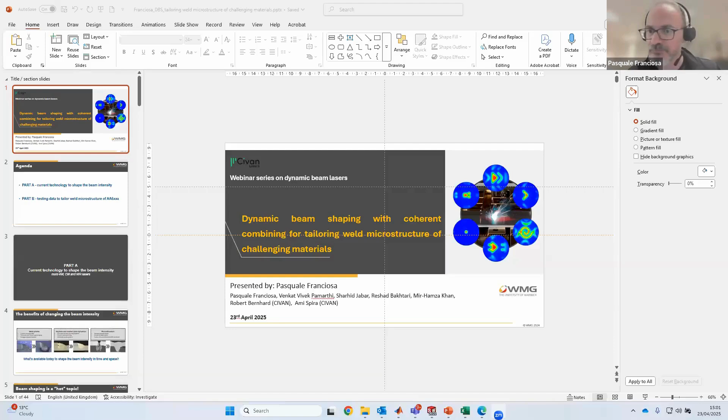Okay, so I hope you can hear me well. Thanks, Ami, first of all, for inviting me to attend this webinar today. So let me start sharing the screen. Can you confirm you can see my screen, Ami? Yes, we can see the screen and hear you and see you well. Okay, perfect, so let me get rid of this. Okay, yeah, so I think I'm ready to start.

So thanks again, Ami, for the introduction, and welcome everybody. I guess you are spread across Europe, maybe America, and maybe from Asia as well, so welcome everybody. I was basically tasked by Ami a few weeks ago to present on dynamic beam shaping with coherent combining for tailoring weld microstructure of challenging materials.

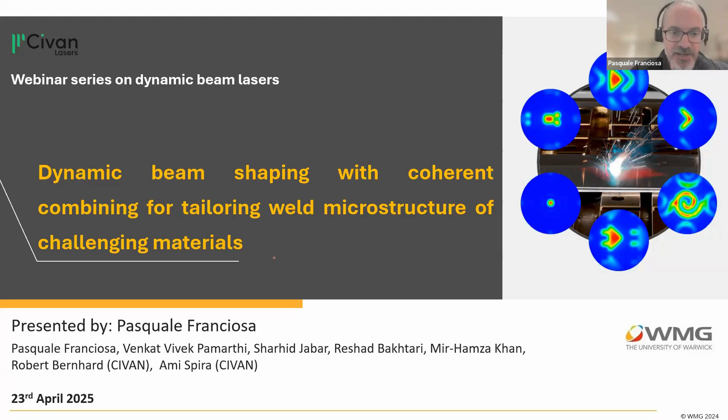This was not an easy task, because tailoring the weld microstructure using laser is like the holy grail - everybody is trying to do that. So what I will do today is present our latest results using the CBC technology from Civan in trying to refine the weld microstructure in specific metal applications, that is aluminum 6000 grade alloys.

The way I've organized the presentation is basically in two parts. Part A will be a review of current technologies for shaping the beam intensity, shaping the intensity in time and in space. Then we jump to part B, which is more the testing data and experimental evidence from experiments we've been doing recently on some of the 6000 grade aluminum.

The reason why we have been focusing on aluminum 6000 is because of the high solidification cracking sensitivity. And obviously refining the grain structure with those alloys is quite important, because if we succeed, there is a significant margin in improving the mechanical properties and the mechanical strength.

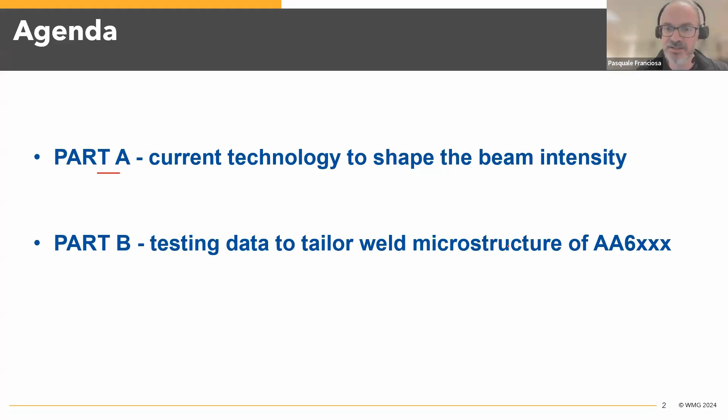So now let's start with the first part of the webinar. As you can see, I've been focusing the attention only on multi-kilowatt CW near infrared lasers. I've been omitting some of the other well-established technologies for beam shaping because they don't fit within the scope. So don't be surprised if I am ignoring a couple of other technologies which are available out there.

First of all, why we do beam shaping - this was the expectation and the benefits of implementing a beam shaping solution within our welding process. We can probably divide it across three areas. First is about optimizing the weld profile, or controlling in a better way the weld profile, and this means eventually enlarging the process window, or bridging bigger gaps between parts, which is very critical in many manufacturing environments.

The second area, which is also growing quite significantly, is the possibility of controlling the keyhole and in general the molten pool dynamics. If we can do that, we can eventually reduce or control the porosity and the spatter during the welding process, and increase the welding speed. There is really significant research around area two - people all over the world focusing on different approaches for controlling molten pool dynamics, including the molten pool shape. There are many contributions coming almost every couple of days.

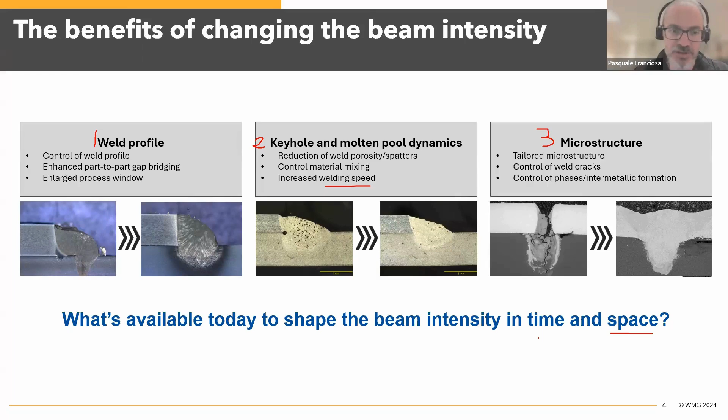So now the question is, okay, we know the potential benefits of beam shaping, but what can we do to achieve beam shaping? And when we say beam shaping, it's not only the beam shaping in X and Y, or in Z. Beam shaping can also be done on the focus steering, so X, Y, Z. But it's also about time shaping - shaping the intensity distribution also over time during the weld operation.

Beam shaping is a very important topic, and you can see from the amount of papers which have been produced over the last few years. Probably 5 or 6 years ago, beam shaping was growing, but was not very visible to the broader community. But over the last 5 or 6 years, starting from 2020, it's almost exponentially growing. So the interest of people in research, in applications, and in industry has been growing very significantly.

This graph, we took data from the Scopus database. We used those keywords you see there with beam shaping as an additional keyword, and you can see some of the statistics. This proves that beam shaping is an emerging trend within the laser material processing community. There are many contributions, and on our end, we're also investing time and resources to really understand more and more what we can do using beam shaping.

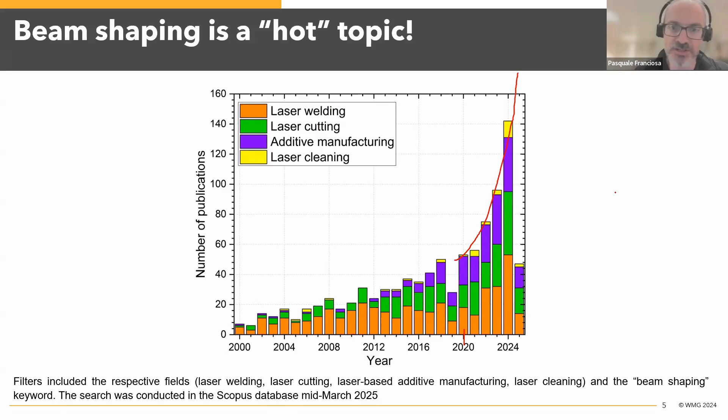Within e-mobility, so within the electrification and e-mobility sector in automotive, those are some of the core applications where beam shaping has already been deployed. Very common in those areas are applications of wobbling and core-ring technology, so central core and outer ring. Now, different materials, different thicknesses, and different speeds involved bring different eventual properties of the beam shaping used.

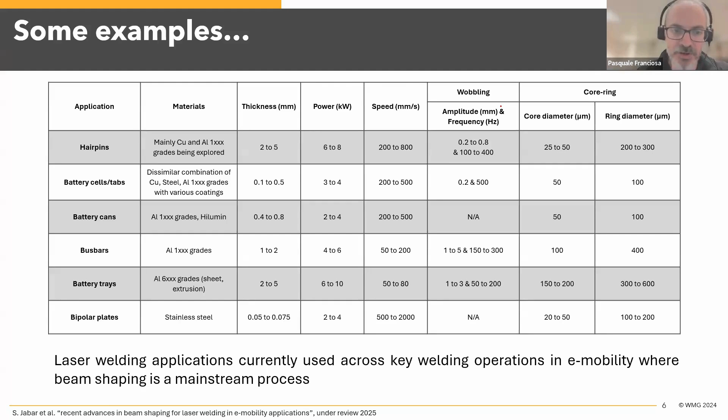Now, why do I say wobbling is a beam shaping? Because in essence, by using wobbling with a galvo scanner, you are also steering the beam intensity on the workpiece. So that, to me, is classified as a beam shaping technology. But I will come back in the next couple of slides and show you how we compare wobbling technologies against the bigger picture of beam shaping technologies. So just keep it in mind.

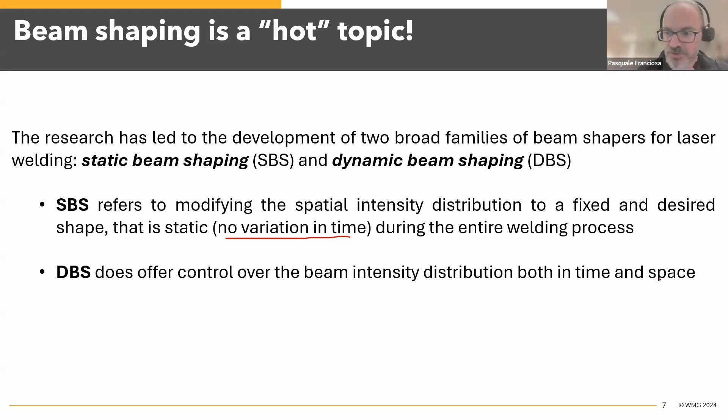In essence, there are two categories: static beam shaping and dynamic beam shaping. With static beam shaping, we can control the intensity distribution in X, Y, and Z, so in space. However, it's static, so once we set it up, we can't change the distribution over time during welding. There is no variation in time. Dynamic is adding the missing element—dynamic means we can control the intensity distribution in time and in space, with different resolution of time and different resolution of space.

So there is a clear dynamics, and the whole idea of using dynamic beam shaping is to influence those physics as they are happening, in such a way that we have a tailored response of the material properties in the end, once the weld, the material, is resolidified.

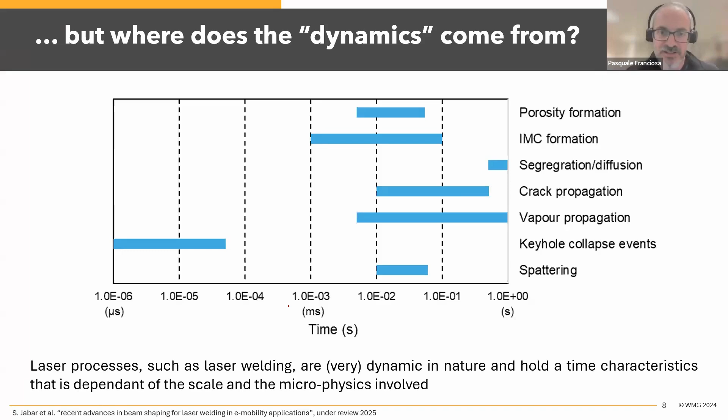So how does it work in practice? When we say beam shaping, starting from static solutions—static basically means we are somehow altering the optical configurations within the welding head. The simple solution is to add what we call aperture elements. Typically, you can put these just on the collimating path or on the focusing path of the welding unit. In essence, you are just limiting the opening for your laser light, so you can get some sort of shaping. This is not very efficient, and it's not even too much used in industry today, because you're literally wasting some of the laser energy and not transmitting it through.

So more established is option C: the possibility of using diffractive optical elements (DOE) and refractive optical elements, or also micro lens arrays, which again you can retrofit within the optical element. The benefit is the possibility of generating theoretically free-shape distributions on the workpiece.

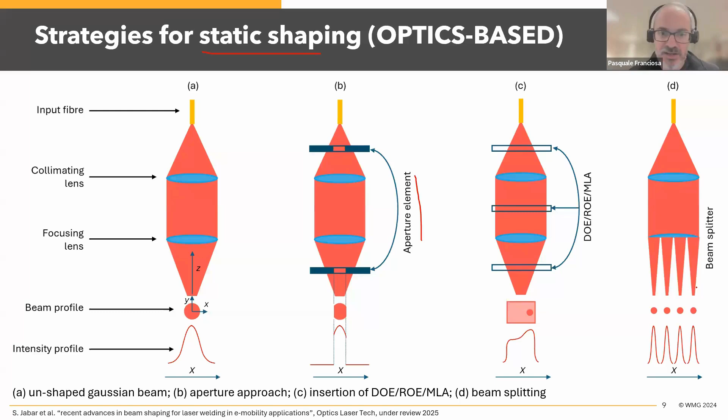Other options include beam splitting, which splits the light into multiple spots on the workpiece. This is quite established and works well if you want to reduce processing time, since you have multiple beams running at the same time.

The deformable mirror is not very industrially deployed yet, but conceptually you have multiple mirrors electronically tilted in X and Y, and because of that you can get a free shape profile on the workpiece. It's quite interesting, but not that fast—we're only talking a few hertz modulation over time.

Another option is MPLC, multi-plane light converter. This also theoretically gives a free shape profile on the workpiece, and we're talking tens to a few hundred hertz modulation. So all those options—E, F, and G—are within the scanning family.

Non-scanning families, so in-source solutions, we can probably group into two categories. One is fiber to fiber coupling, where you get the very famous core-ring configuration for beam distribution. This is well established in industry, starting probably 5-6 years ago. There are a few different industrial implementations of this technology, but it's only limited to one shape, core ring.

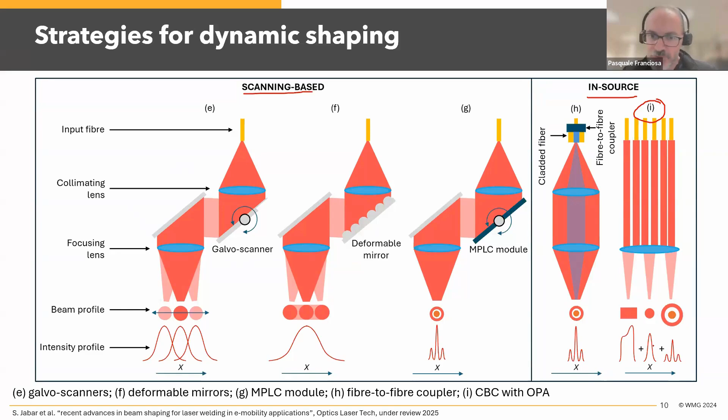The way it works is the laser machine itself modulates the phase between all those single mode beams. Because of the phase modulation, you can theoretically and virtually get any free shape on the workpiece. On top of it, since it's fast enough—we're in the megahertz switching frequency—you can switch between shapes during welding. So there's a lot of opportunity and capability there.

So this I've already discussed briefly, but you can see the pros and cons of those technologies. Interesting enough is this level: the possibility of controlling the temporal distribution of the beam intensity during welding. With the static one, obviously there's no way of adjusting unless you're modulating the input power.

With the dynamic options, yes, there is a possibility, but you're eventually limited by the switching rate. Using the CBC, you can go very high, talking several tens of megahertz, close to 80 megahertz, so switching within a few nanoseconds—quite fast. Also more interesting is the scalability of the power. With the CBC and OPA, you can go very high power, probably even more than 100 kilowatts today, with theoretically no limit.

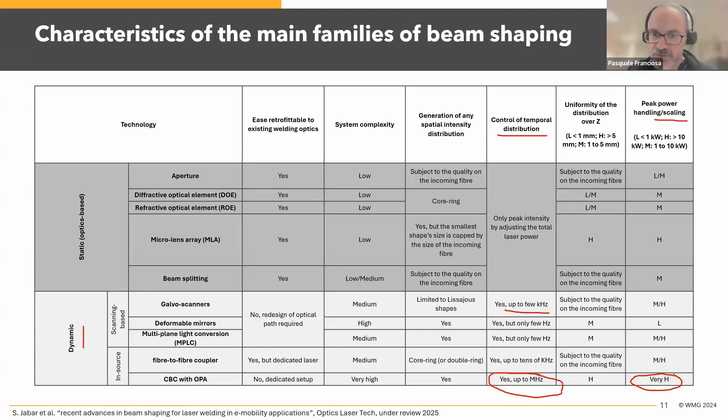So again, there are benefits, but this also brings more complexity. Now this is an important point I want to raise: when we talk about dynamic beam shaping with the CBC, with OPA, we shouldn't assume we can generate a static shape from there. With the CBC, the shape is always dynamic.

So if you look at the example on the slide, and I say I want to create a shape with 3 dots—one, two on the side, and a central main dot in the middle—we'll never see this profile on the workpiece at once. You'll always see the combination over time, with a given dwell time of the diffraction pattern. So the shape generated by the CBC is a combination of multiple diffraction patterns overlaid over time.

So in essence, what we are controlling on the workpiece is the fluence - the energy we are throwing to the workpiece by overlaying over time multiple diffraction patterns. How many diffraction patterns? It depends on the resolution of the beam intensity we want to get in the end. But theoretically, we can go to 1,000 diffraction patterns overlaid within as small as 12 nanoseconds.

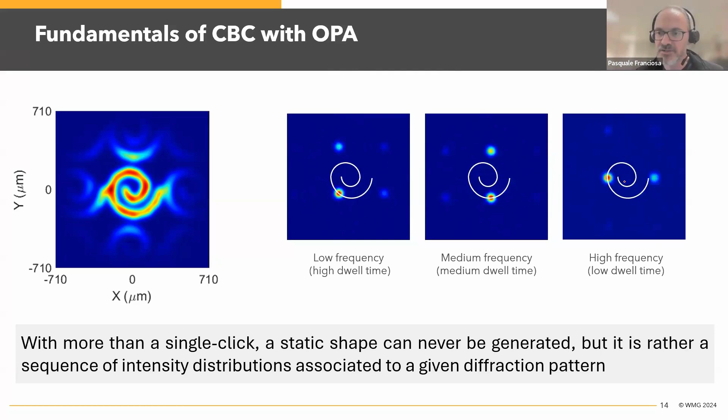You can control the frequency of switching between those diffraction patterns. You can go very low in frequency, so very high dwell time, or the other way around - switch with very high frequency, so very low dwell time. These are important points to remember, because by using this technology, we can really influence the thermal cycling during welding by switching at high frequency on and off those diffraction patterns. And one diffraction pattern basically means energy concentrated within those dots you see on the screen animated.

And this is a question now: does it mean we can control the thermal cycling? The answer is yes. So if you take a single Gaussian beam, just the Gaussian dot in the middle, and you imagine you are moving the dot horizontally towards the right-hand side, that is exactly what you do when you do welding, because you are traveling with your laser beam on the workpiece, and you're plotting against the interaction time.

So here I'm tracking position 0,0, the same point on the workpiece. I want to see how the intensity is changing as the beam is moving horizontally in that direction. So with a single Gaussian beam, you will see basically the Gaussian profile on the workpiece - a very sharp transition of the intensity profile.

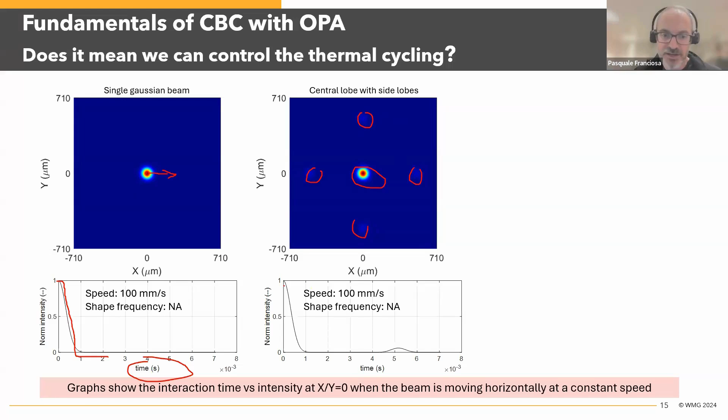If you do the same exercise with the most fundamental diffraction pattern you can get from the CBC, you will see a central dot in the middle and then 4 satellites we call lobes on the side. You can see the cross section of the intensity profile with the lobes on the side.

Interesting enough, if we add more than one pattern - for example overlaying 3 diffraction patterns very close with each other - you can get like a slightly elliptical shape. Then you can see what's happening to the intensity profile: you're basically switching on and off, on and off, and you can see how the intensity is going up and down, up and down.

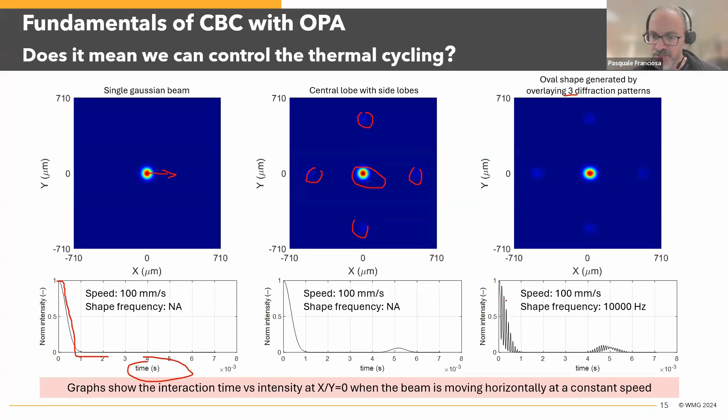By modulating the frequency, or by choosing the right frequency for your process, it's like a duty cycle you can induce in your material. Duty cycle is what you do with any pulsed laser - nanosecond, femtosecond, or picosecond laser. You are controlling duty cycle. It's not something you do with CW lasers.

So now the question is, there is a possibility of modulating the intensity profile in as small as a few nanoseconds. How can that capability help in influencing the grain structure? Can we use this technology to really make changes to the grain structure? So conceptually this is what you see on the slide.

We start eventually from the liquid phase - the metal is in the liquid phase. Then because of the cycling, we are cooling down. And then again, after a few milliseconds, a few microseconds, we are pumping in some heat input within the weld. You can see eventually the grain is refining, the segregation is distributed, and then you get the property which is optimal for your application in the end. So that is the concept.

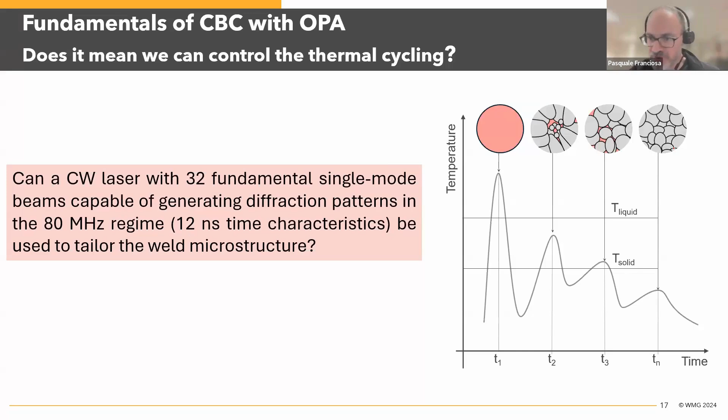Now let's put this concept into practice and see how this looks. This starts part B of this webinar, and I will focus on two applications around laser welding, autogenous laser welding of 6000 grade aluminum.

Why did we select this application? First of all, 6000 grades are very well used within different industrial sectors, especially automotive but also aerospace, so there is significant, massive demand for those alloys to be welded. However, they're not very easy to weld, especially if you want to weld without adding any wire or altering the chemical composition.

The cracking process is quite complex, a complex interplay between different parameters and different physics involved. In essence, it's a combination of microstructural and metallurgical elements together with stress and strain related elements. Some theories say the crack happens because of the shape of the molten pool: if it's very stretched and elongated there is more crack sensitivity. If there's a chance of reducing the extent, especially of the mushy zone, there's a chance of reducing crack sensitivity.

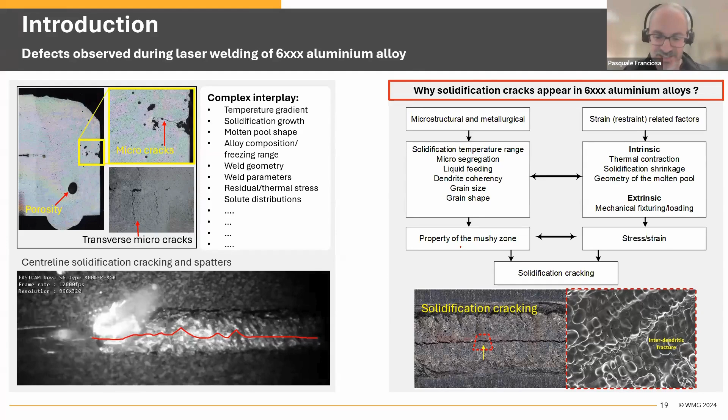So cracking is a complex process. People have been researching the reasoning for cracking and solutions to hot cracking for many years, but it's still a hot topic in industry because we are still facing challenges when welding those alloys.

To put this in perspective, here on the slide is some data from testing experiments we've been doing recently. This was a comparison between different welding processes: CMT on one end, then laser welding with addition of a filler wire, a wire-fed welding process, and then autogenous welding, only laser without even shielding gas.

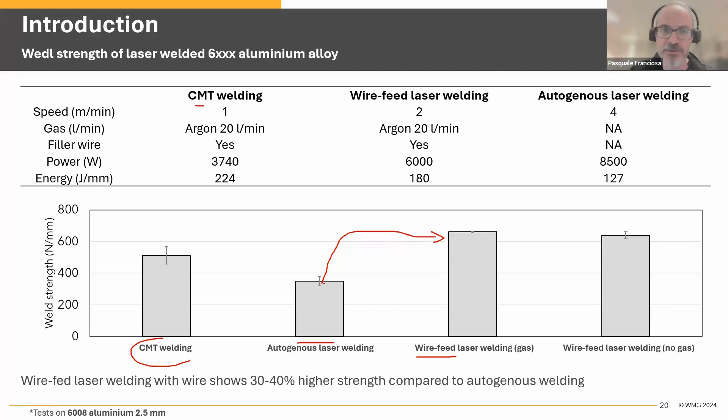You can see the gap: there's almost a 30 to 40% drop in strength when welding those alloys fully autogenous. A 30% drop in strength is automatically a no-go from a certification point of view, so the end user will never accept that level of strength because it's not satisfactory.

Now, beam shaping. We have been researching static beam shaping for some time, doing different testing and trials. You can see schematics of some of the shapes we've used, starting from single core, then core ring with different diameters, and even a tailed beam profile.

All those shapes are static, but you can see the trends in mechanical performance, tensile stress. There's approximately a 20% increase in strength when you go from a single spot to a tailed beam profile. All those welds were made with the same processing speed, 25 millimeters a second, on the same material and thickness.

This basically proves that even with static beam shaping there is already margin for improving weld performance. Why is that? You can see from the EBSD map that the reason for the increasing strength is most probably grain refinement—more grain boundaries means a chance of increasing strength. That's just background information.

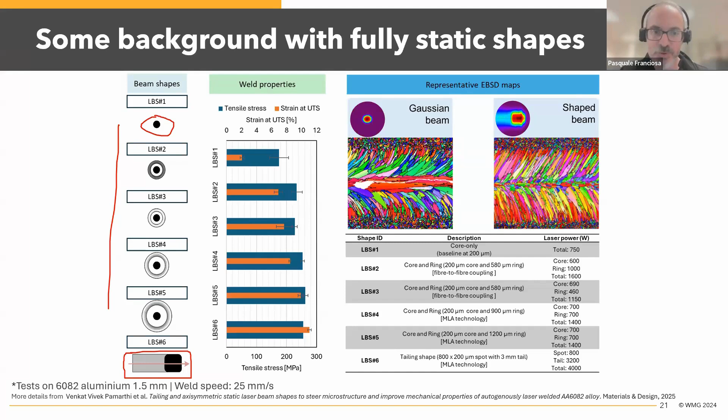With that knowledge, we started working with the CBC technology, asking ourselves: is there margin to improve properties even more? Is there margin to tailor the grain structure to meet specific weld properties in the end? This is where we started.

Application one is on 6061 aluminum, an overlap weld. The sheets are quite thin, 0.4 on top and 0.8 on the bottom.

Yeah, and this is what we did. So this basically is a comparison between the CBC technology from Civan.

In this configuration, we are using the 1.5 meter focal length, which gives the smallest spot diameter on the workpiece, close to, let's say, 130 microns is the smallest one. Obviously, if you reduce the focal length, you will get a smaller spot, but in this project we have used 1.5 meters focal length.

So welding speed was constant for all the experiments, 110 millimeters per second across all experiments. Power was on average between 3.3 and 3.5 kilowatts for either a single click or a sequence of clicks. A click is understood as a diffraction pattern, so one click is associated with a single diffraction pattern. No wobbling, no shielding gas, and the fumes were extracted with a fume extractor positioned nearby the weld area.

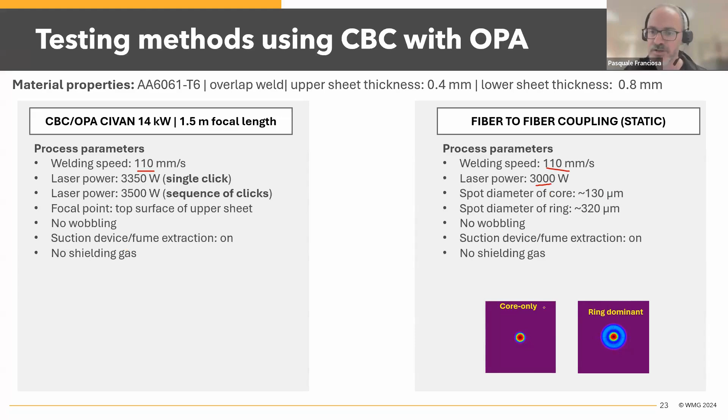So we've been benchmarking against the more standard core ring technology. Again, the speed was the same, the power was slightly reduced because the core spot was slightly smaller, and again the same clamping and the same welding conditions.

For the beam shapes, we started with very fundamental shapes: only a central lobe, so a central spot with 4 satellites, which are a consequence of the diffraction pattern with the CBC. Then we moved the point either to the left or to the right. Moving to the left-hand side is like adding a second spot into the diffraction pattern.

This means eventually doing a preheating, because there is a spot traveling in front of the weld, preheating the material. If you do the other way around, moving the spot towards the right-hand side, it means it's a post-heating exercise because the spot is coming behind.

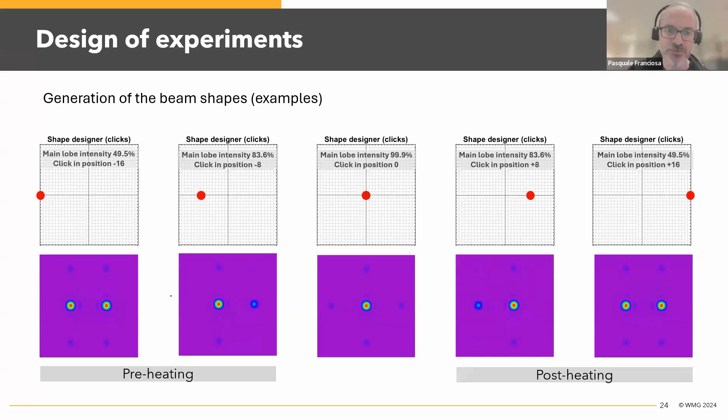This logic makes sense because, using the same laser with the same input power, you have the possibility of switching the spot forward or backward, doing either preheating or post-heating on the material. And we wanted to really see how the weld microstructure looks like.

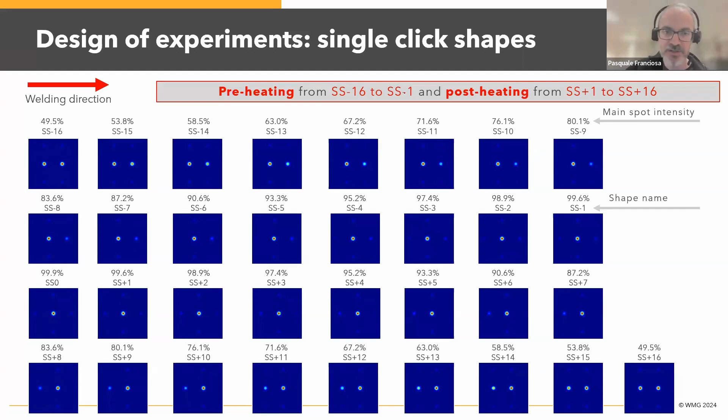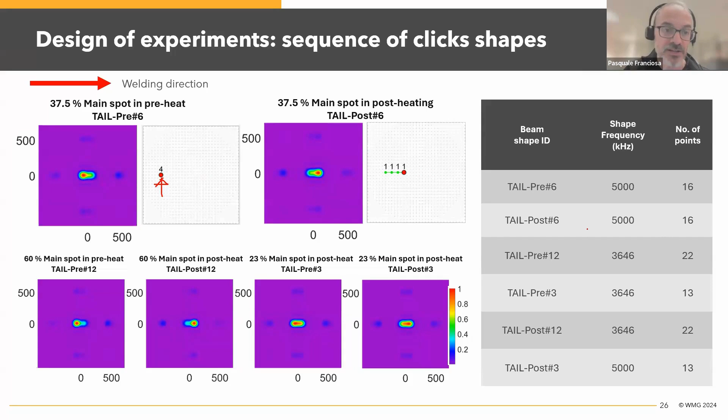With that logic, we generated those 6 profiles. Again, the welding speed was exactly the same, 110 millimeters a second, and the power was adjusted to get full penetration across all those welds.

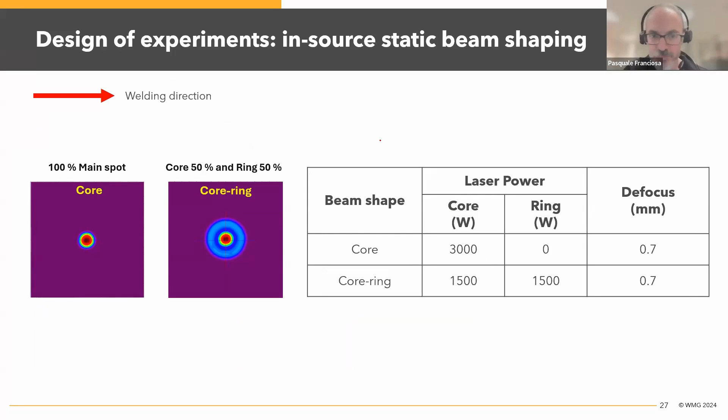And those are the parameters for the core ring. Again, the power has been adjusted in such a way that we got full penetration on the weld - that was the basic requirement to say the welds are comparable in terms of weld profile.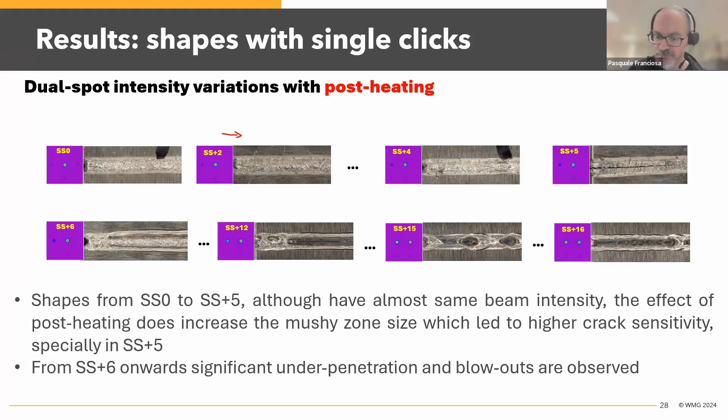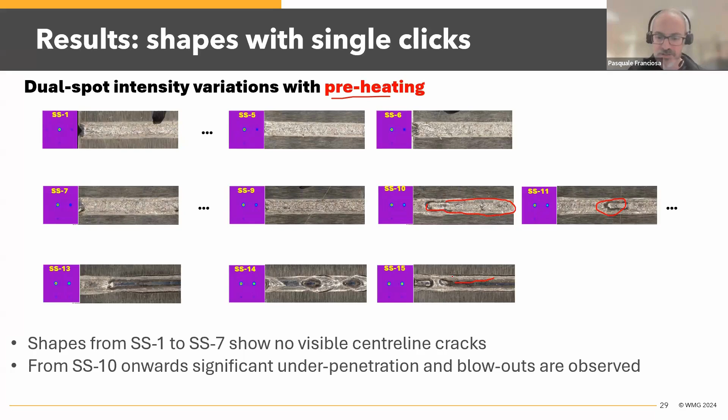Now if you do it the other way around, with preheating, we follow the opposite logic, so we switch towards the left-hand side. The spot on the front becomes bigger and bigger as we shift towards the left, up to position 7, which is almost centreline crack free. As we keep moving further on the left-hand side, we notice the presence of lack of fusion, some blowout, and this again is a massive blowout with very significant lack of penetration.

So if you analyze the cross sections, this was very clear evidence from all those experiments that when we are preheating, because of the preheating spot, we are preheating the material itself. Since the material is very thin, only 0.4 millimeters, the tendency is to basically pre-bend before the main spot comes into it, and this adds a significant void. That void is basically caused by the preheating beam coming in front.

That effect doesn't happen with post-heating. On post-heating it's the other way around, we are only heating the weld that has already been created, not before. So the warping effect is much reduced.

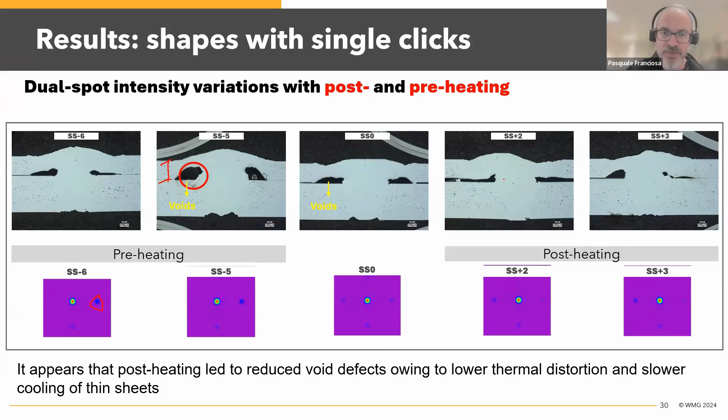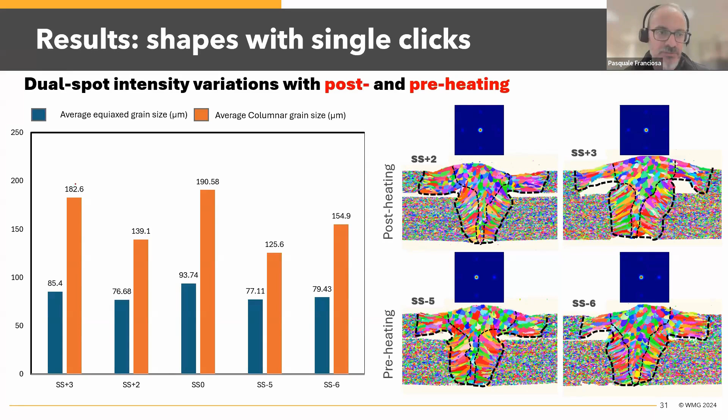Now, if we go to the analysis of the grain structure, on the slide you see some of the EBSD maps, which are probably the most relevant ones. You can see from the bar chart the distribution of the grain, equiaxed grain and columnar grain. There is a trend, but it's more interesting to see the full picture.

This is plotting the area fraction of equiaxed grain, starting from the core beam, static beam distribution, to the tailed beam profile with a slightly higher peak intensity towards the front of this elliptical distribution. You can see how the bar chart looks: starting from 25% area fraction of equiaxed grain, ending up close to 55% equiaxed grain.

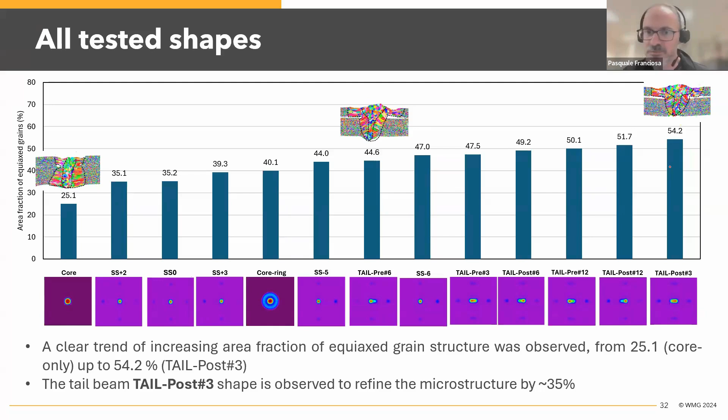This basically proves that by selecting the appropriate beam profile, there is clear evidence that you can tailor your microstructure. By tailoring the microstructure, especially in this case with 55% area fraction, it means there is 55% refinement. It means there are more grain boundaries within the weld, and with more grain boundaries, the mechanical property of the weld is eventually going to be improved. It's a stronger weld, because more grain boundaries means increased mechanical performance.

However, we have to pay attention to one element: since with the diffraction pattern we have those side lobes created within the beam distribution, those lobes are not negligible. They account for approximately 35 to 40% of the total intensity distribution, and 35 to 40% out of 3-4 kilowatts or even more is quite significant. You can see the effects here - this area on the left and this area on the right is the direct consequence of those lobes.

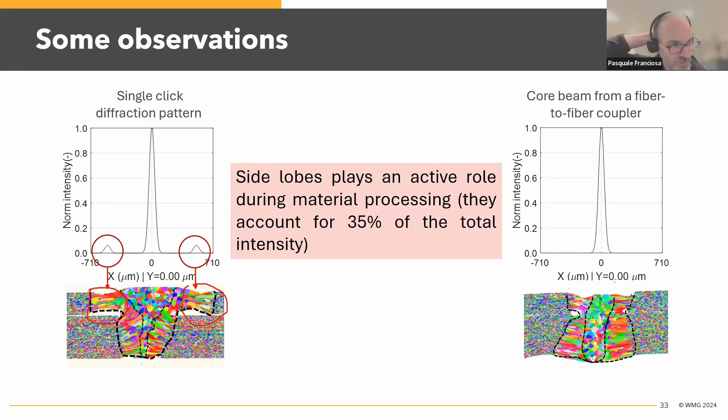So when doing laser material processing, like welding, but also additive manufacturing with this technology, we have to pay attention to the position of those lobes. If we don't, we might have unwanted or unexpected defects and not know why. So we have to keep an eye on those.

So the second application again is on 6000 grade aluminum, 6082. This time it's thicker, 1.5 millimeters, and it's a bead-on-plate testing session we have done.

This time we've been more creative, creating shapes which are more sophisticated. Again you can see in the table the power used - we are between 3 to 4 kilowatts, speed always constant at 100 millimeters a second, and the frequency was kept constant at 2 megahertz.

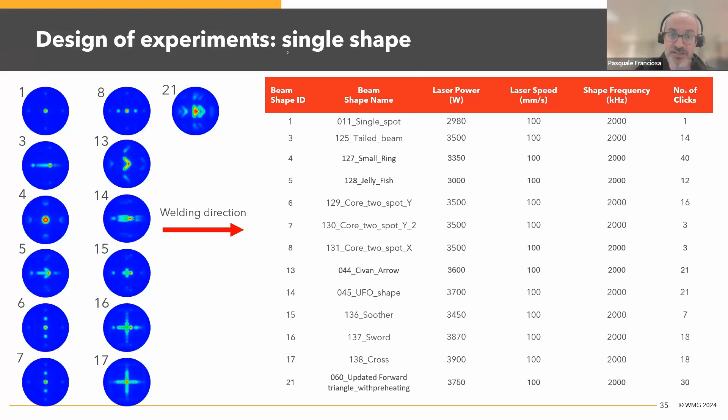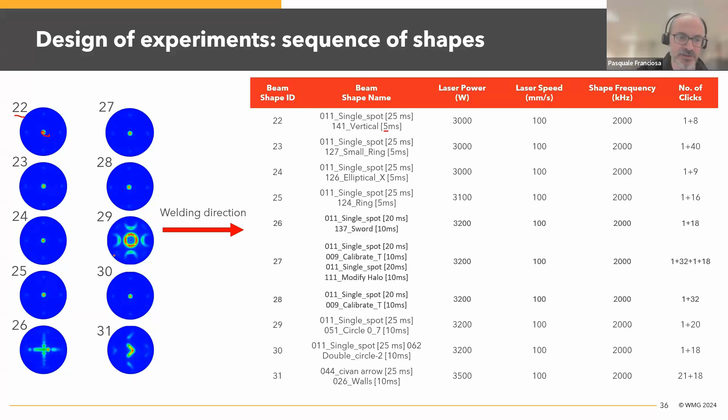So we've been producing, to make all those experiments, it takes time because we have to try the shape and then take all the metallographic sections. So we produce all those experiments. And these are, again, some of the statistics from the EBSD maps.

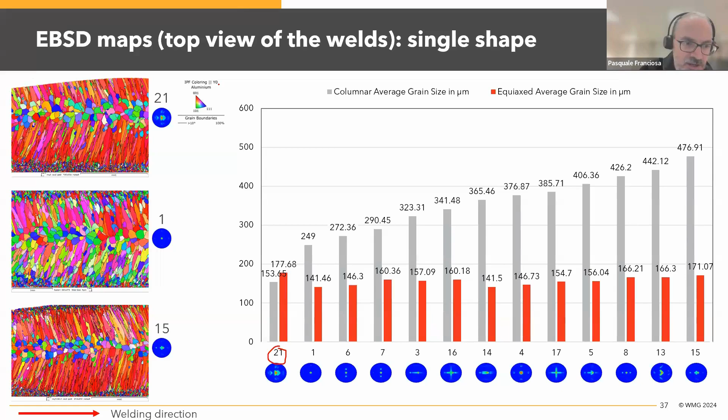So the reason why there is a change in the aspect ratio of those columnar grains is probably imputed to this effect - the effect of modulating, pulsing, if pulsing is the right term to use in this case, the possibility of modulating the heat intensity distribution as you are passing through with the laser beam. And this is exactly what is happening.

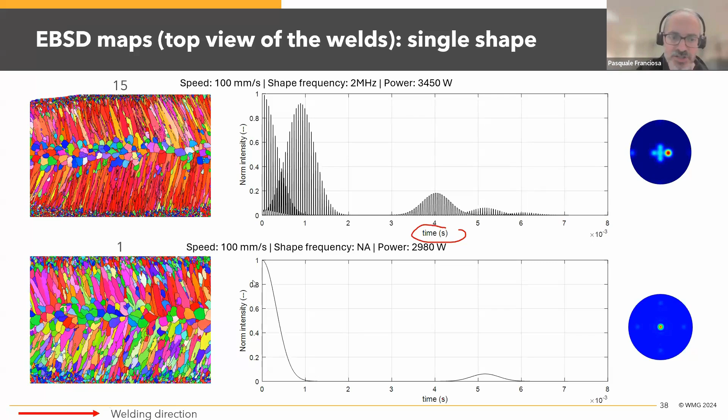We don't have thermal data yet because this is still work in progress. So we don't have evidence from the thermal distribution and from the cooling rate if there is any correlation, but there is clearly a correlation between the beam profile distribution with a given frequency for creating and generating those shapes and the corresponding grain structure produced in the end.

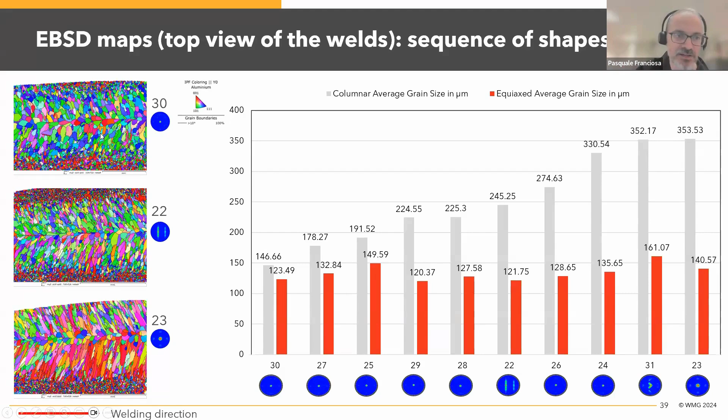So this one is showing some of the results with actual sequences of shapes - so this is more than one shape. For example, shape 30, you are starting with a single dot in the middle, and then we have a sort of ring going around, and it's going on and off at the given frequency, and then same for other cases. And then again, we have evidence of grain change in the grain structure.

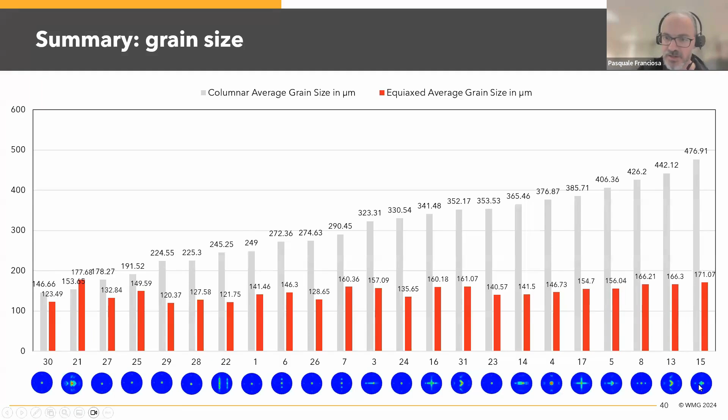So if you put all the results together, you can see the spectrum of how much the structure is changing. Focusing on the average size of the columnar grain, you can see you go from 150-ish microns up to 480 microns. If we analyze the aspect ratio of the columnar grain, there is probably a four-times fold change, from 2 to 8, in aspect ratio of the columnar grain.

Now, which one gives the best mechanical performance? That is probably something we have to do more testing, more characterization to say. Right now let's try to match this data to the tensile UTS data of the material itself, which is ongoing. So this is a live project we are currently focusing and working on.

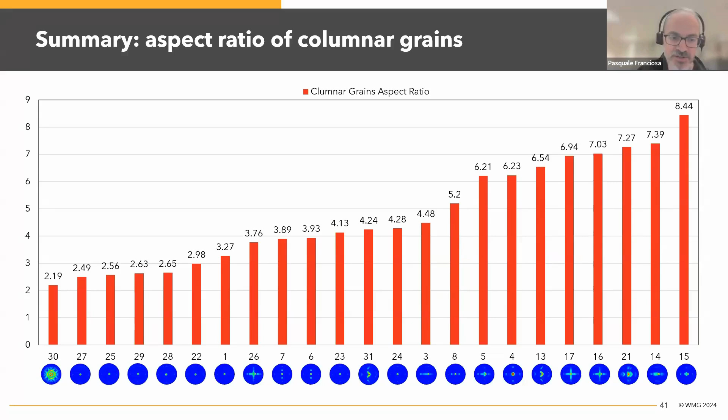But the interesting result of this exercise is the possibility of tailoring the material properties of the weld in such a way you get whatever aspect ratio you want to see in the end for a given process requirement. So this is quite now interesting and fascinating.

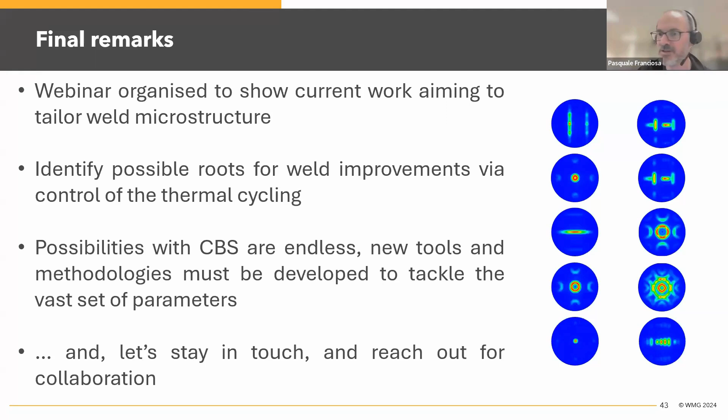However, this opens another question: we have all the flexibility and possibility of tailoring the structure, but how do we choose the right shape for the right process and the right material? The options are endless, so research is evolving, saying we need new tools and methodologies to tackle the vast set of parameters which must be optimized to select the right shape.

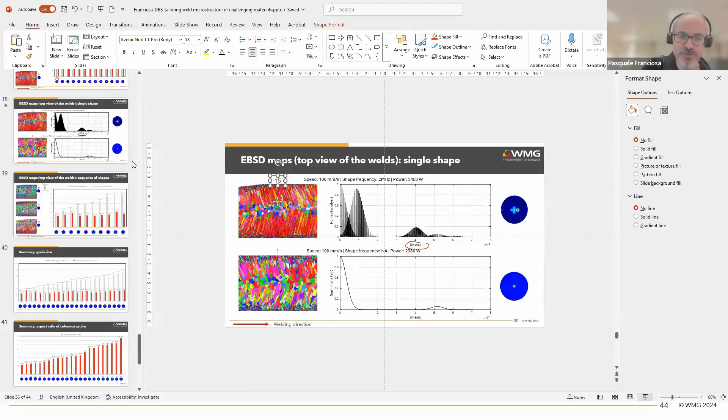With that, we are currently running a European project together with partners from Europe and the UK, called Laser4Mass. One of the main targets of this project is to deploy dynamic beam shaping technology across multiple industrial sectors, and to tackle the complexity of selecting the shapes to make this technology deployable across multi-industrial sectors. You will see more and more in the coming months, since Laser4Mass is a funded project with multiple partners working on this topic. So stay tuned, because I'm sure you will see more coming in the coming weeks and months.

With that, I have done, and I think we are just on time to take questions and have a bit of discussion on some of the topics I've been presenting. Obviously one hour isn't enough to cover all those elements, but at least I tried condensing the content within the time available. I'm now happy to take any questions from the attendees. Ami, I think it's for you now, since I don't have access to the questions.

First of all, thank you for the fascinating talk. I invite the audience to write their questions in the Q&A box at the bottom, and I will ask them. First, you talked about it a bit at the end of your presentation, but regarding the beam shapes you showed, specifically the shape sequencing you used, was there any reasoning or logic behind the sequences, or was it just random to see the differences between the different options?

No, the sequence isn't random. There's always some reasoning, either based on our experience or our knowledge of the response of the material itself. The overall reasoning in selecting the sequencing is to try to add a bit of post-heating to the material, to the weld itself, because we know from theory that eventually we can influence the structure somehow. That was the main reasoning. Then, to translate that reasoning into the actual shape, we tried different shapes with different gradients and different extents in X and Y, to see how they look.